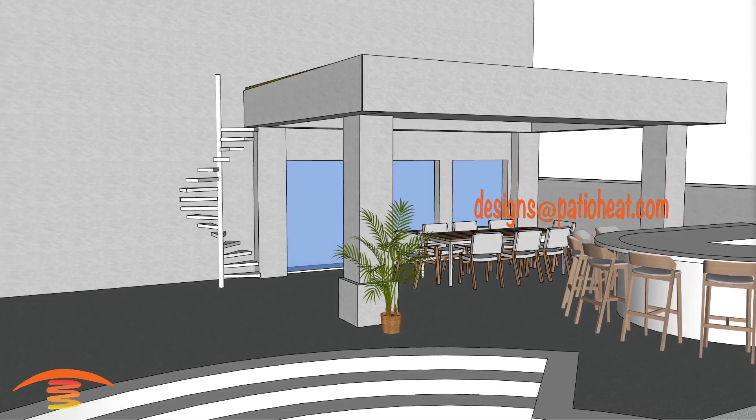Now let's get heating. All right, so here we have this residential patio, and fortunately, we received this information in the design phase, and that's always a benefit.

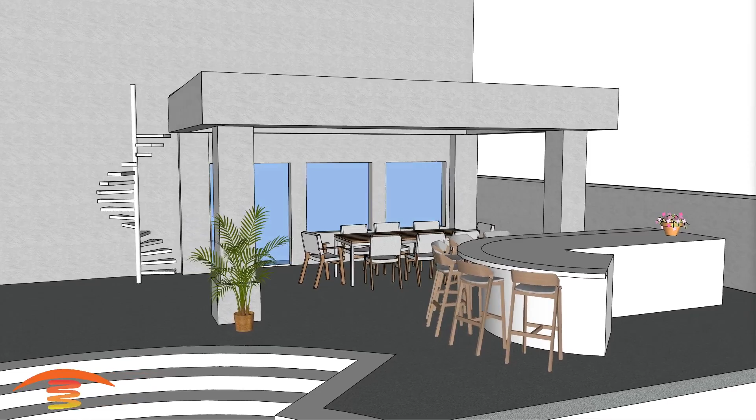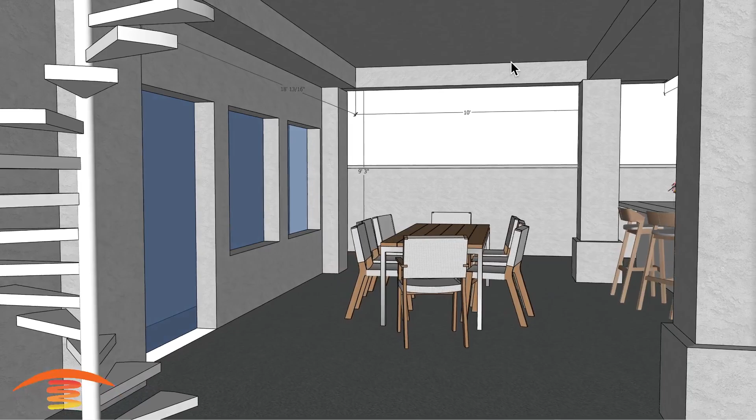So let's go ahead and look at the overall dimensions. We have 20 foot by about 14.8, and a ceiling height of about 9'3", 18 foot from this inner edge over here to the right-hand side. This is the recessed section of the patio, a 10-foot section over here. Now, this 10-foot section from here to here is going to be important so that we meet the clearances to combustibles on a flush mount.

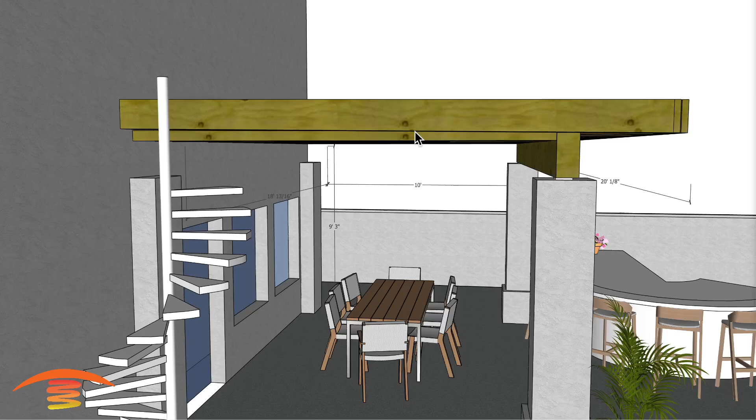Now, what I want to do is go ahead and look at the construction, and this is just my view of it. I'm not an engineer, I'm not a designer. We just make the recommendations for the type of heaters to be installed.

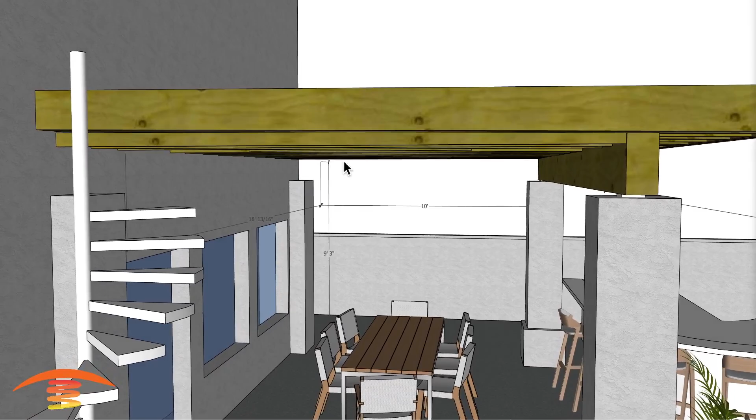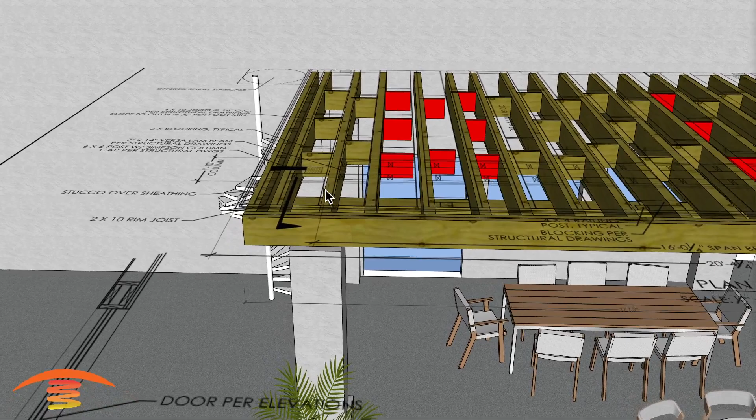But in any case, what I have here is the deck itself is on a slope, and then they have a flat section down over here to keep the ceiling flat and level. Also, if we looked at the plans they sent, you can see the ceiling joists that come across here, I believe at 16-inch centers or something of that nature.

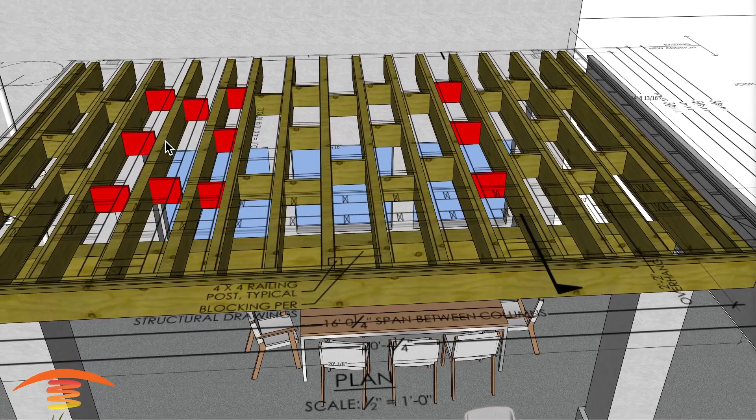But in any case, I have them all at 16-inch centers, with the exception that I moved this one here, and this one over here slightly, just a couple of inches. The reason is so that we can actually install the flush mount kit in the best location. So let me go ahead and turn off that plan and show you what I'm talking about here.

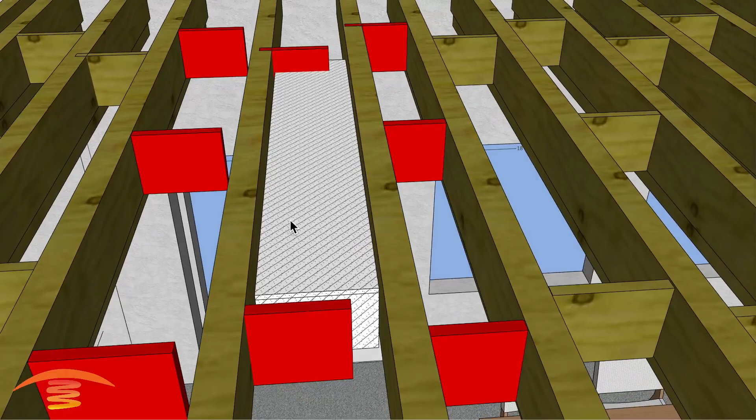So if we install the flush mount kits, first of all, you have a 1-hour fire rated drywall, I believe it's 5/8 drywall, and that surrounds the entire flush mount kit itself. If we went inside here, you'll see the heater itself, the flush mount kit, and here's the drywall section over here. Now you can see I also made all of these blocks here in red.

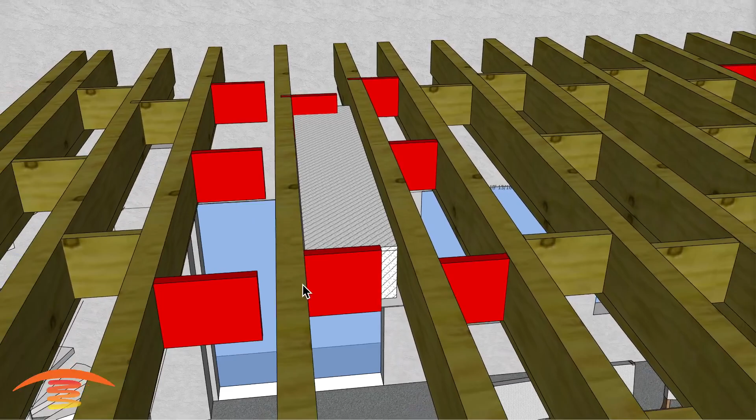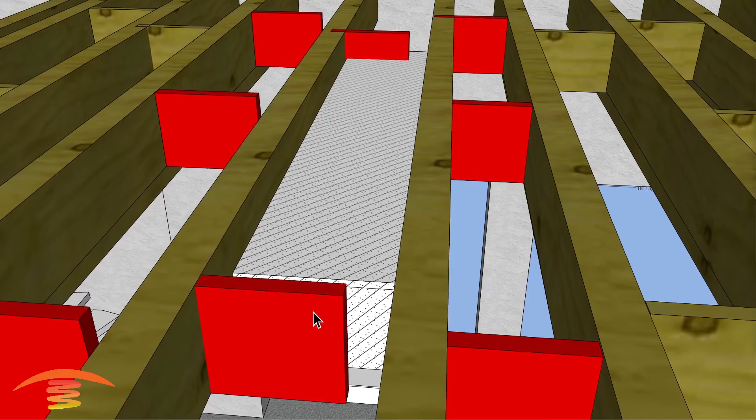That's because I moved this one a little bit further to the right, because I'm just assuming that structurally you need to have a more uniform distance between the two. And then this one here would have to be a little bit wider than all the rest. That's true with all the red blocks that I've put here.

And then also this one here would have to be moved outside, so that it's on the outer edge of the drywall finish here. Let's see if there's anything else. This one over here would have to be removed.

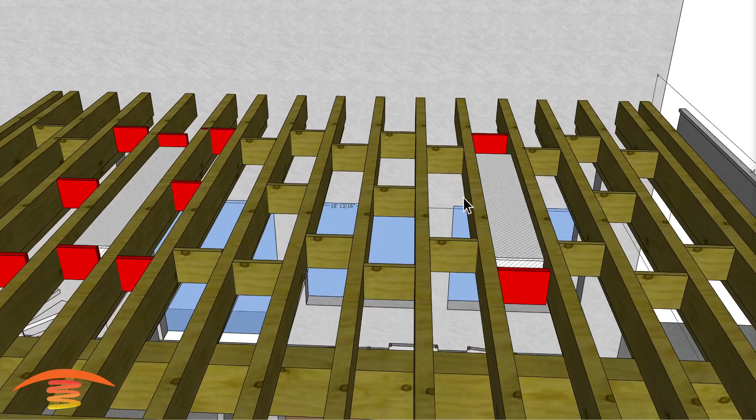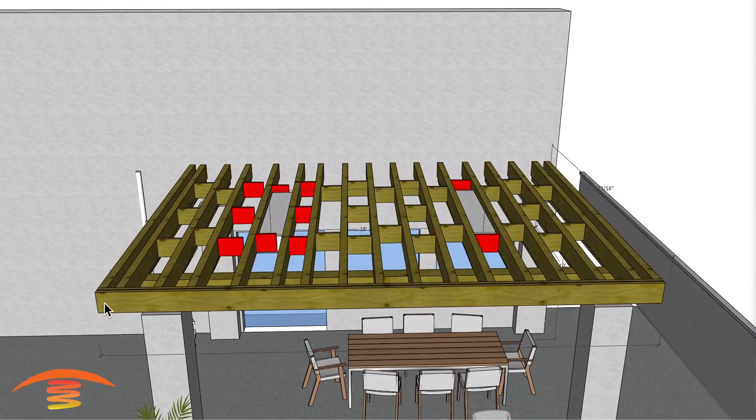What I wanted to accomplish is, if we looked at the distances between the heaters, I have them at 9-foot centers, and I tried to center that within the total span of the patio itself, so that it would look the best, I guess.

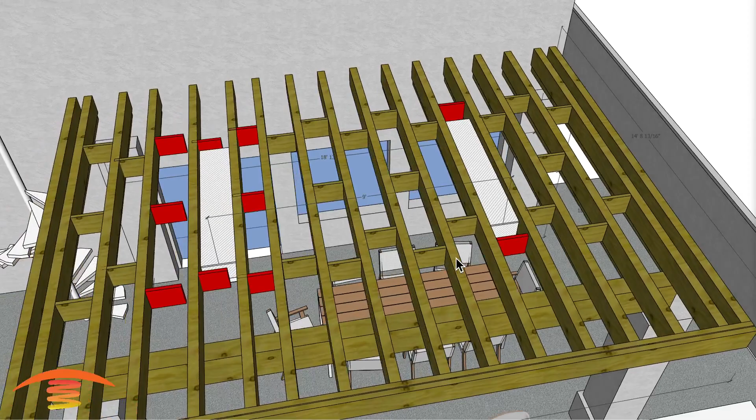Also, I should mention that there are going to be some recessed lighting, so you could put some recessed lighting on this side here, or this side over here, and the same over here. But this will allow for more uniform coverage throughout the entire span of the patio itself.

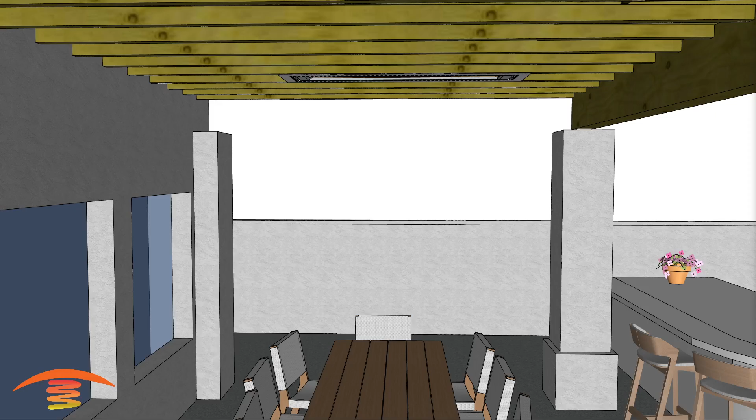I'm going to go ahead and turn off the overall dimensions here. Again, that was 9-foot center to center, and the heater itself is centered within that span I spoke of before. Let me go ahead and turn this top back on. So this was that 10 foot from here to here, and so that would be 5-foot center to the heater itself.

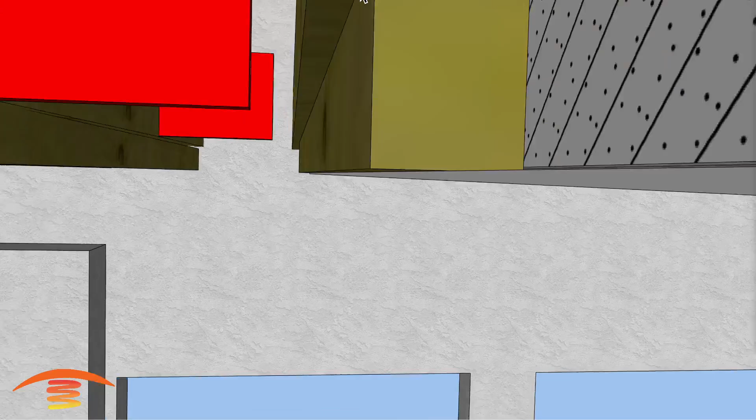And then what I wanted to also show you is this is going to be a stucco finished ceiling. With a stucco finished ceiling, I always like to see the heater itself mounted onto the beam itself. So what you do is you drill a few holes throughout this area here, and then mount the flush mount kit itself to that.

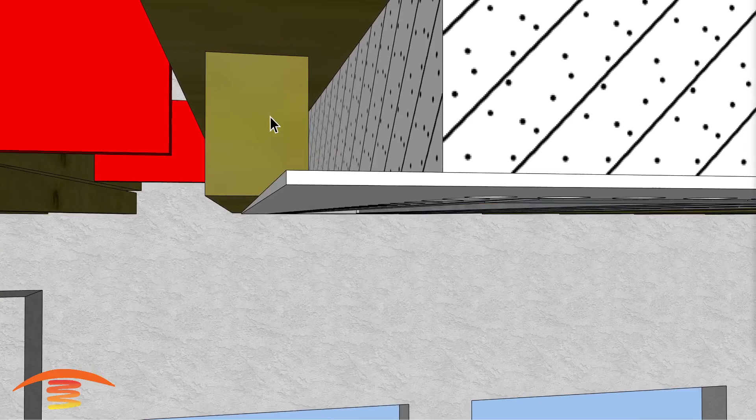The heater itself fits into the flush mount kit, and then you'd put the surface of the stucco surface on the outer edge. You need to make sure that there is a 1/2 inch from this edge here to this edge here of clearance, so that there's plenty of ventilation for the heater itself.

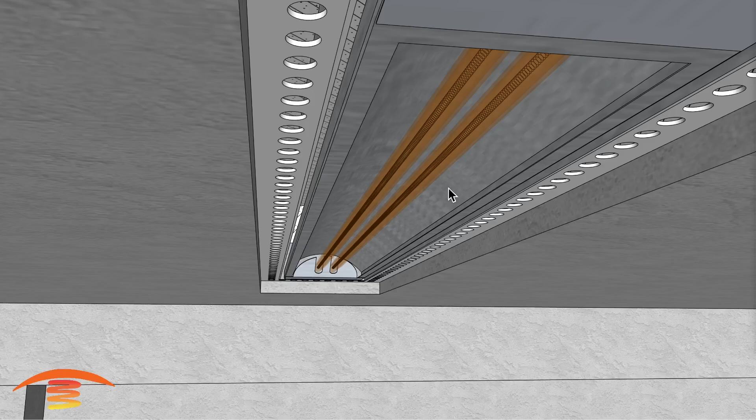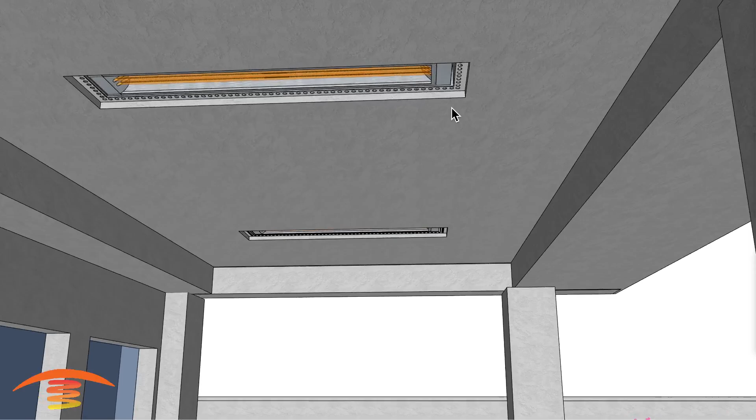And yeah, so that just makes the unit itself look much better in the application, rather than having the whole flush mount kit visually shown. If I pulled it down here, it would be, let's see if we can show that here. Let's go with one more.

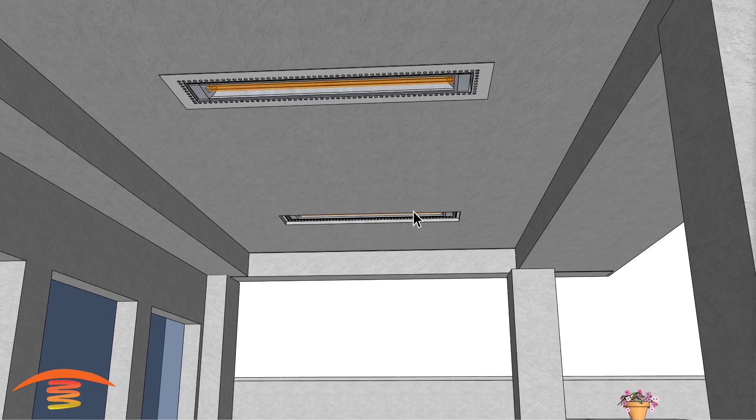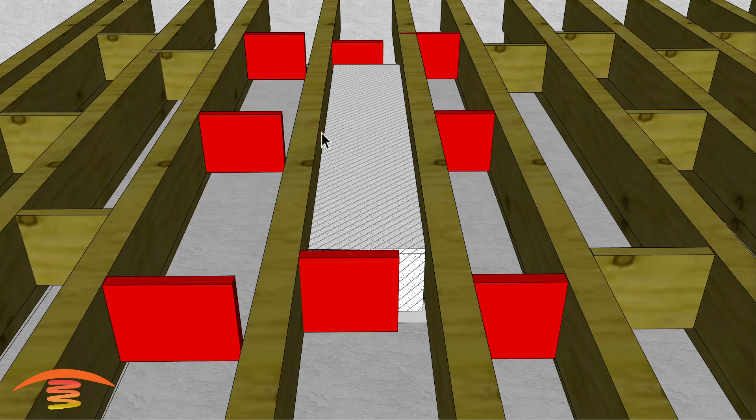So if you saw it this way, I think it looks a lot better in this fashion than what I'm showing you on the top one. In any case, these beams would have to be moved to allow for that clearance. I believe it's 13 inches from this edge to this edge for the proper construction.

Let's see if there's anything else. I think that's about it.

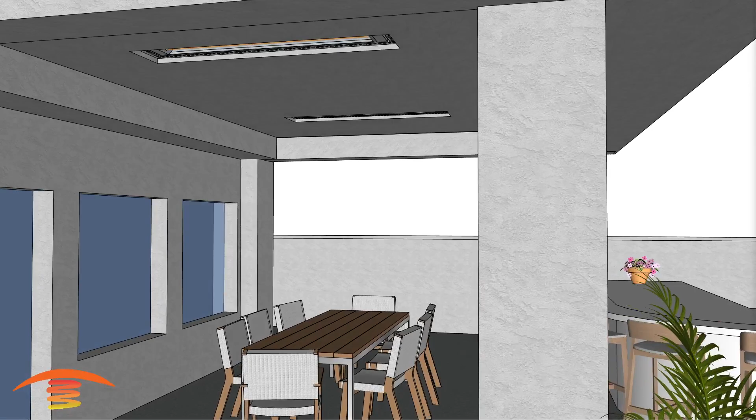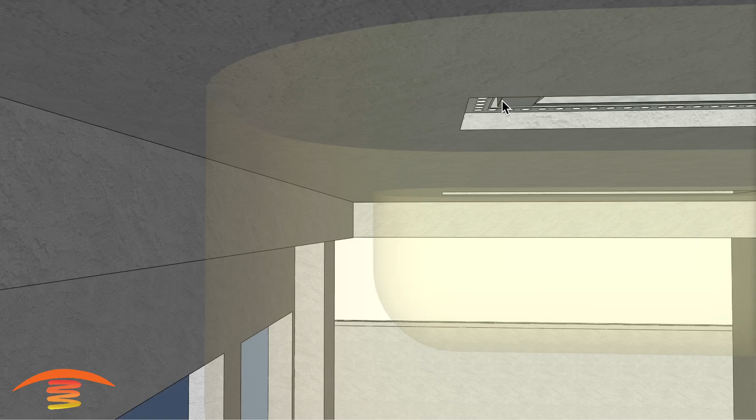Let's go ahead and look at the clearances below, just to talk about that real quick with the 10-foot section here on the edge of the heater. It's actually the edge of the heater itself, not the flush mount kit, but you need 18 inches of clearance to any combustible surfaces, and stucco is considered a combustible surface if there is a wood frame behind it. So 18 inches over here and 18 inches on all 4 sides. Sorry about that, and I think that's about it.

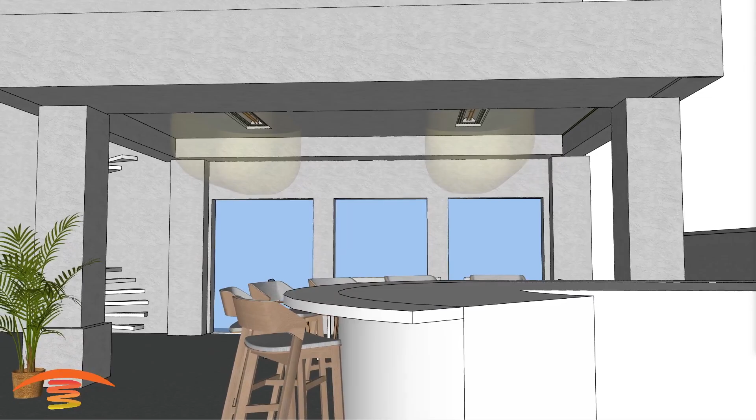Let's go ahead and look at the footprint of heat to see how this would work out for this particular section. You can see the footprint of heat is really good. Even though these are 6,000 watt units, and you see some minor coverage over here, this is infrared light wave.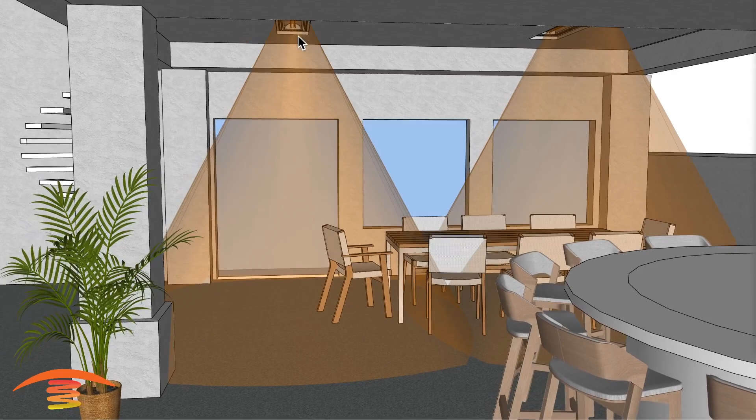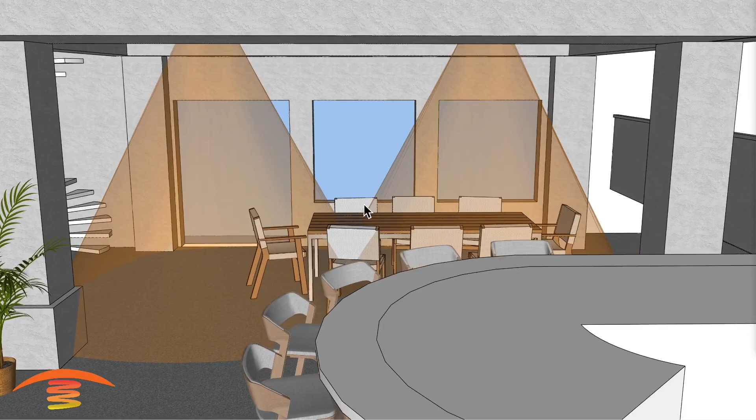Infrared light wave is a wave of light that bends and stretches as it travels away from the surface of the heater itself, so there will be some overlapping rays. This is just showing the most ideal footprint of heat, or what the manufacturer states is best. But when you have the nice crossover rays, that just makes it more comfortable. This whole span becomes uniform with the crossover rays in the middle.

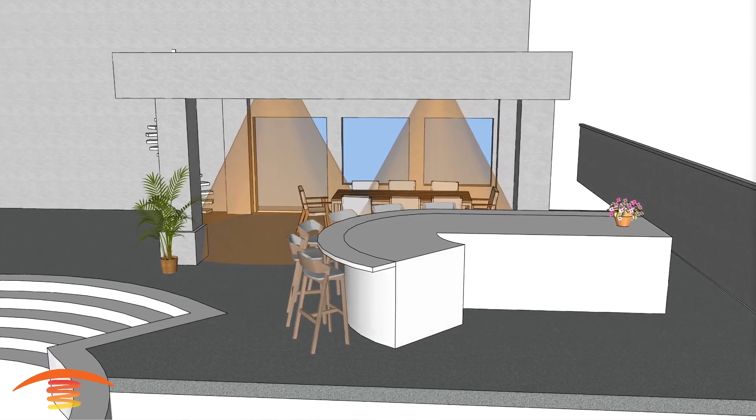Last thing I wanted to show is, if they are looking to heat something like this, you could put a heater on the outside edge. I just don't think that would look too great. So maybe instead you might want to put a Sunglow heater here.

What I've done here is I've taken a PSA 265 Sunglow model, and down below we have this, called a deck mount. I didn't cut this because I wanted to explain it a little bit, but you would have to cut the post itself to whatever the height is of that deck mount, wherever it would be secured.

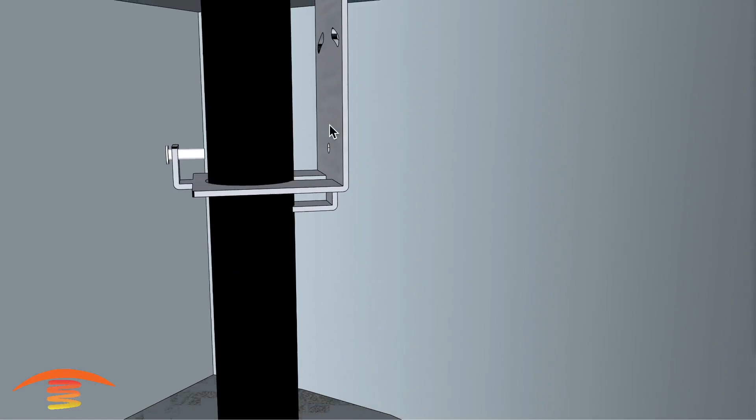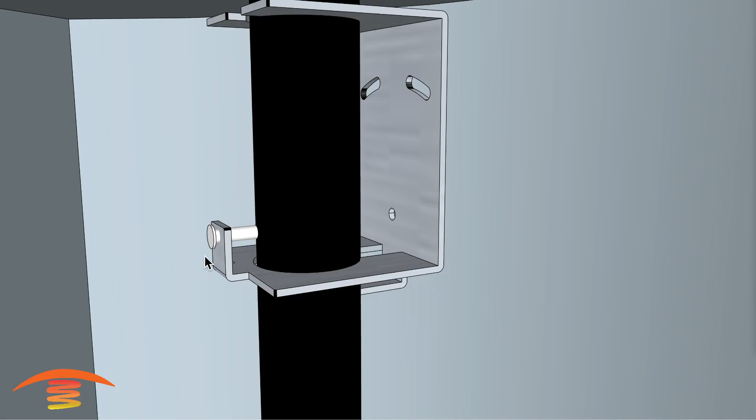Say there's a post down here somewhere, but in any case you would put a couple of bolts through here and here, and this would be the attachment point for the actual post itself. Then there's a bolt that goes through here that would secure that to the deck mount. You can loosen that bolt and remove the post should you not want to have the heater out there.

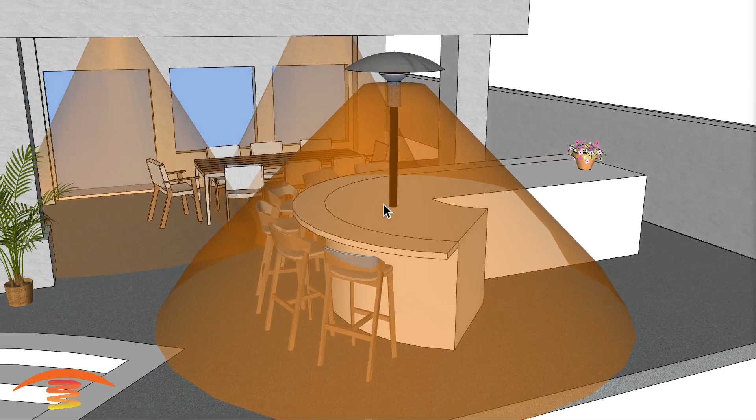Now, I don't like this layout that much because what I had to do is make sure I have a total of 24 inches of clearance from edge to edge of the heater, and then place the heater trying to make it look uniform within the span. I would probably like it a little bit more to the left, so the coverage on the seating area is a little better, but I don't like the look of it.

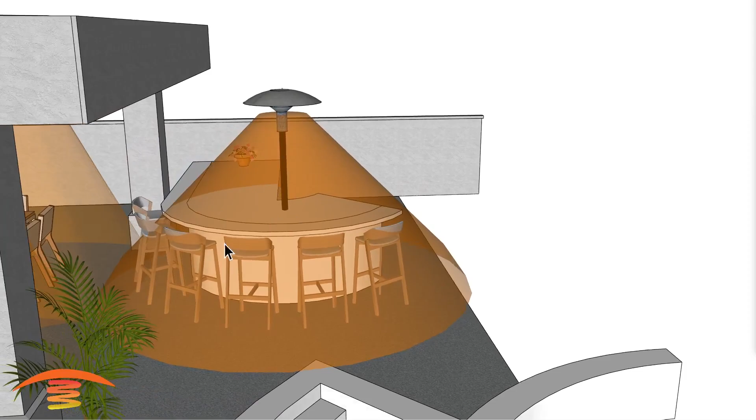So just something to think about as far as the possible placement of a unit out here. Let me go ahead and turn that off. And I think that's about it.